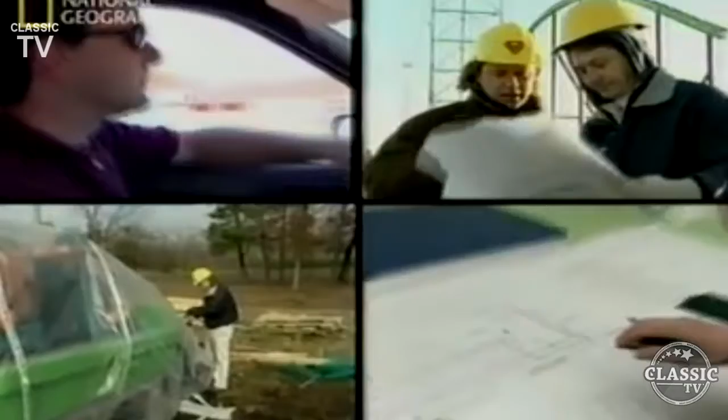This is ground zero of the roller coaster wars. On this empty patch of dirt, a crack team of engineers hopes to conquer the record books and build the coaster that rules them all. But it'll take a mountain of steel and technological wizardry to pull it off.

This is about bragging rights. For all its thrills, an amusement park's signature coaster is the one that counts. It is these monuments of pure power and speed that draw the big crowds.

If all goes to plan, they'll launch Kingda Ka in one year. It's a tall order, at 45 stories high, and accelerating from 0 to 206 kilometers per hour in 3.5 seconds. This ride will be the closest you'll get to getting shot off the deck of an aircraft carrier, or pulling out of a dive in an F-16.

So we've got to bring a crane in.

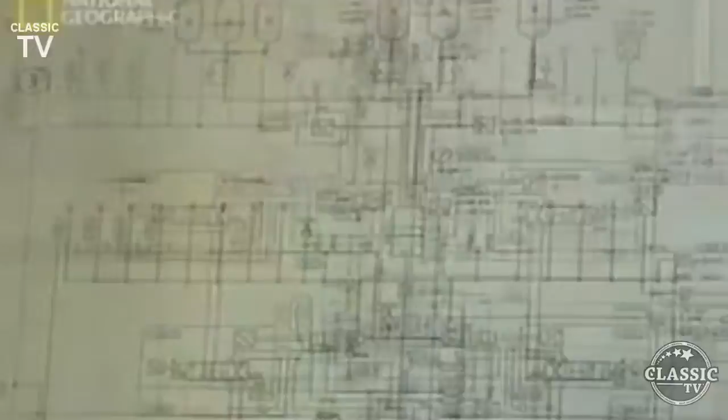But are the designers behind Kingda Ka pushing the technology to the breaking point? The track record for this new breed of rocket coasters is littered with mechanical problems. Will it be safe? Is it worth the $25 million risk? In the hyper-competitive world of amusement parks, you bet it is.

When you tell the public that the tallest roller coaster is in your park, people who aren't interested in roller coasters or parks are going to take notice, and they're going to be curious, and they're going to want to go to the park to even just look at it, even if they don't ride it.

In the last decade, the roller coaster wars have escalated. 61-meter megacoasters have been around for years, but in the spring of 2000, Cedar Point Amusement Park in Ohio threw down the gauntlet, breaking through the 91-meter height ceiling with Millennium Force, the first giga coaster.

For speed freaks, the watershed moment came in 1997 with Superman, The Escape, at Magic Mountain, California, shattering the 161 kilometers per hour barrier.

Up until 10 years ago, all roller coasters operated on a simple propulsion formula. A slow chain or cable lift pulls the train up the first hill, releases it, and gravity takes over.

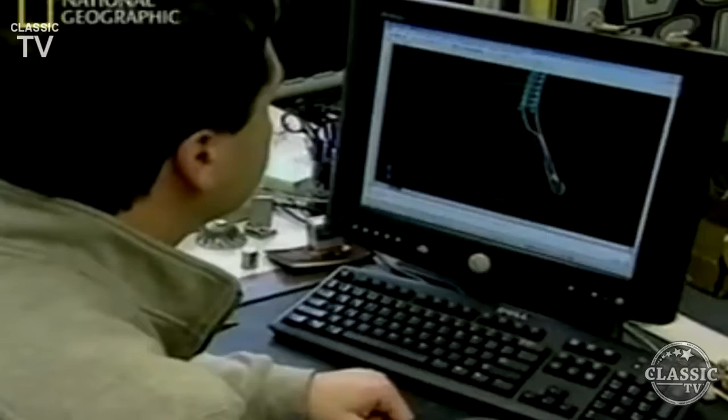Rocket coasters such as Kingda Ka have rewritten the laws of coaster physics, throwing out the idea of the slow ride up the first hill. Rocket coasters are shot out of the starting gate like a fighter jet is launched off an aircraft carrier.

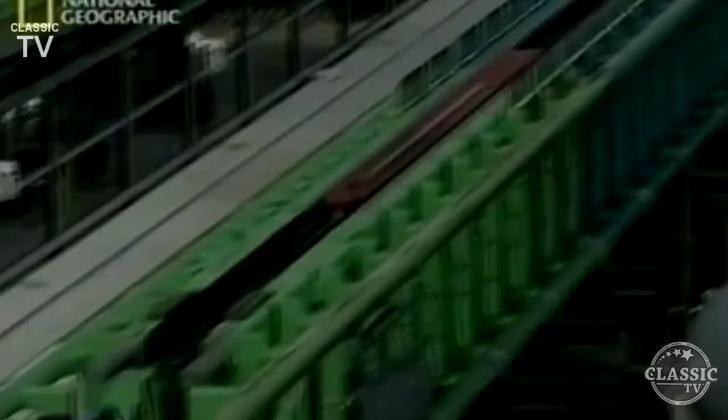The shuttle, or catch car, inside the track is locked into place like a coiled spring. The coaster is loaded onto it and cocked like the hammer of a gun. They pull the trigger and boom, away you go.

Simple. Not really. At least not at speeds in excess of 161 kilometers per hour, and not if you're the chief engineer, but we'll come back to that.

In 2003, a new rocket coaster shocked the industry, taking launch technology to another level and shattering 2 world records. Top Thrill Dragster at Cedar Point, Ohio, stands a gut-wrenching 128 meters high, making it the first strata coaster, accelerating to 193 kilometers per hour in about 4 seconds. It's the closest thing on wheels to a real top-fuel dragster.

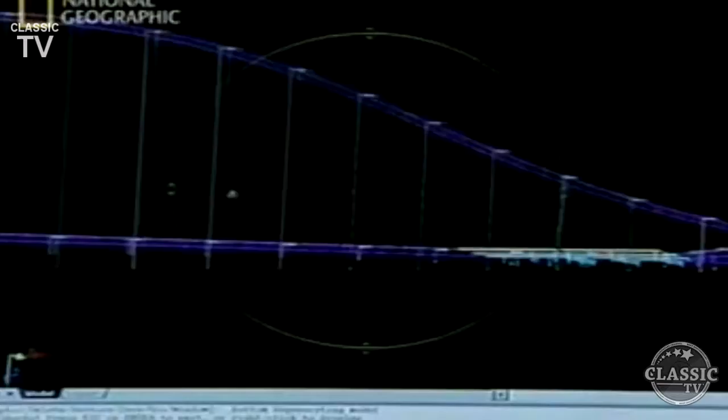Enter Kingda Ka, the monster ride destined to cut Top Thrill Dragster down to size. March 2004: The brain trust from Six Flags Great Adventure in New Jersey teams with Swiss manufacturer Intamin, the builders of Top Thrill Dragster. The concept for Kingda Ka is unveiled.

Yeah, it looks like it's all here.

Great. The idea is to begin with the blueprint of Top Thrill Dragster, but to build their new coaster, Kingda Ka, even bigger, faster, and better. The amount of power for this ride is substantial. The stakes are higher, much higher.

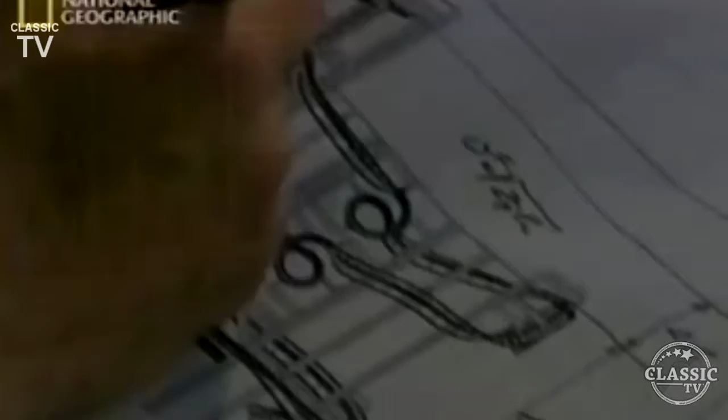The question is, how far can they push the technology? Can it be done? Can it be done in time? The money people are adamant: to be worth the estimated $25 million investment, it has to be ready to ride for the start of the next season.

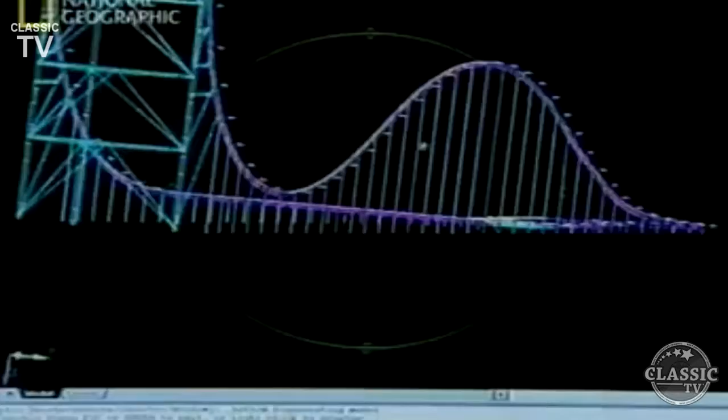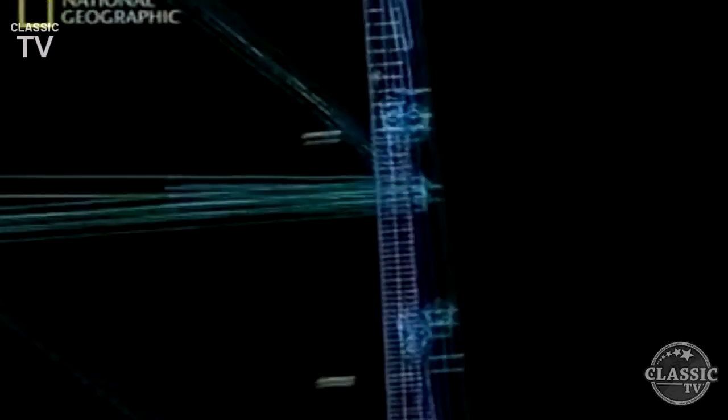Turning to one of the most sophisticated CAD design software programs around, the idea begins to take form. Every meter further and kilometer per hour quicker drives up the cost. Every change in the geometry of the track affects the stress on the rider's body. The formulas for G-forces must be recalculated. The design goes through hundreds of minor variations.

We talked about different heights, how high did we want to go. We looked at the possibility of one with 2 hills on it in the back, and we decided to stay with the single hill.

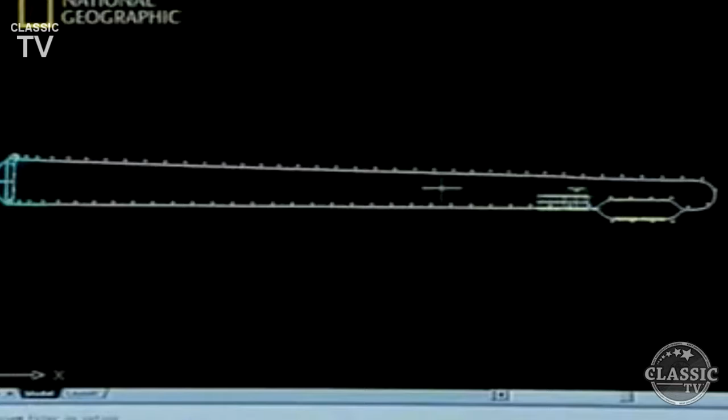The final design is a 950-meter-long track, packing the maximum thrills into the park's allocated space. Its centerpiece will be this soaring 139-meter tower, 4/5 as tall as the Washington Monument, breaking the old record by 11 meters.

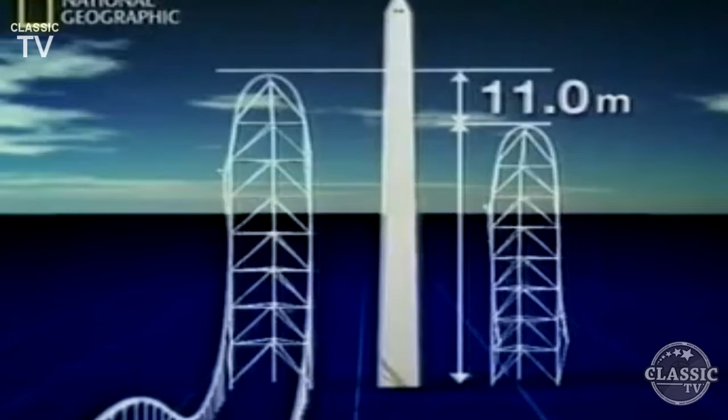The designers can even experience the ride from the passenger's point of view. First, the launch at 0 to 206 kilometers per hour in 3.5 seconds. You are shot up the tower faster than you can say, 'Get me off this thing.' Coming up to the top, we slow you down real nice for a nice look around, and then next thing you know, you're diving at the ground.

It's probably impossible to describe how this would feel to the average person who has never been in a jet fighter, or maybe a motorcycle, but even that is no comparison. This will pin you in your seat. It's nothing like you've ever felt before.

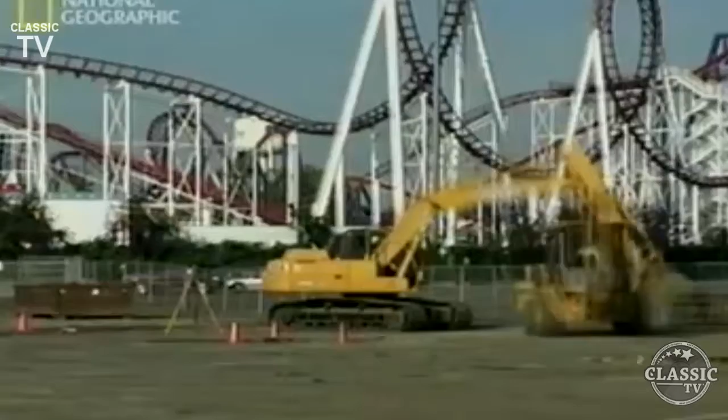Kingda Ka goes into production under a cloak of secrecy. If one of the other super parks were to find out about their plans and steal their thunder by launching an even taller, faster coaster, Kingda Ka would be a huge waste of cash. In this business, second isn't an option.

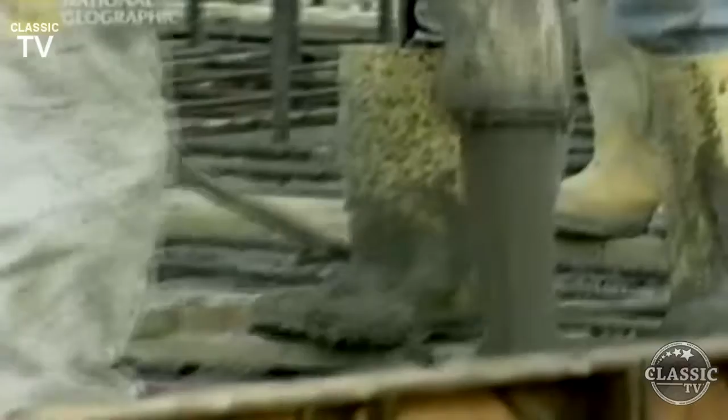August 2004. An A-list of engineers converges on the east coast of the United States, daring to build the dream coaster. As they begin digging the foundation, their deadline is set: April 23, 2005. They have less than a year, and the clock is ticking. So far, so good. If they fail, Six Flags will lose money by the bucket load.

Because of the magnitude of the project, we had to get an earlier start than we typically do for other coasters.

One crew works on building the giant tower, while a second crew works on the smaller Camel Hump Hill, approximately 45 meters away. They take advantage of the warm fall weather to get as much of the coaster's track done as possible.

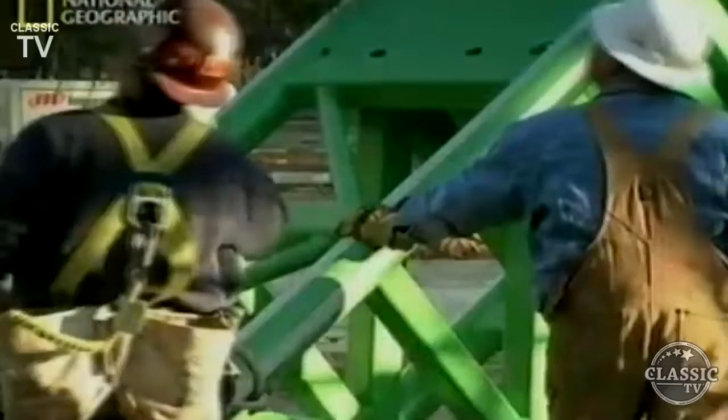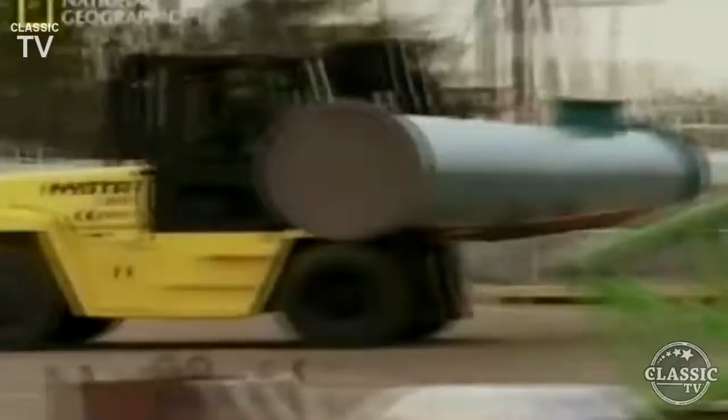By November, the coaster is beginning to take shape. The plan is to work non-stop, 7 days a week, even during the winter months. But just when they're making progress, a severe rainstorm shuts them down. Little do they realize that this is just an omen. There is much worse to come.

It is now late November, and the brutal storm that has shut down construction of the world's tallest, fastest roller coaster shows no signs of letting up. The deadline of launching Kingda Ka next spring is in serious jeopardy. Every day the rain falls is like watching thousands of dollars go down the drain.

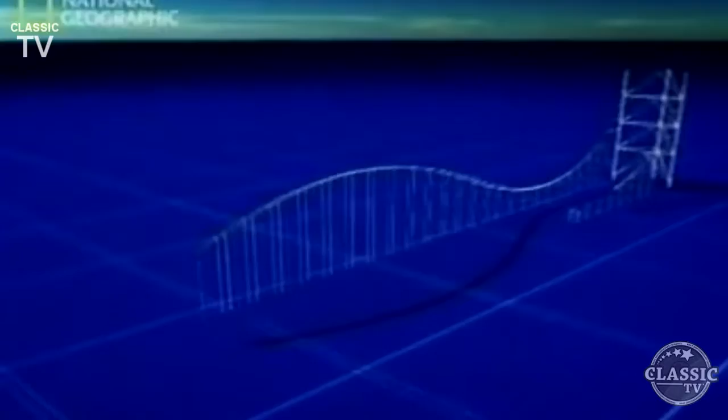One crew is supposed to be working on the mammoth 139-meter tower that stands half done. The other team is trying to finish the 39-meter high Camel Hump Hill. But work is at a complete standstill.

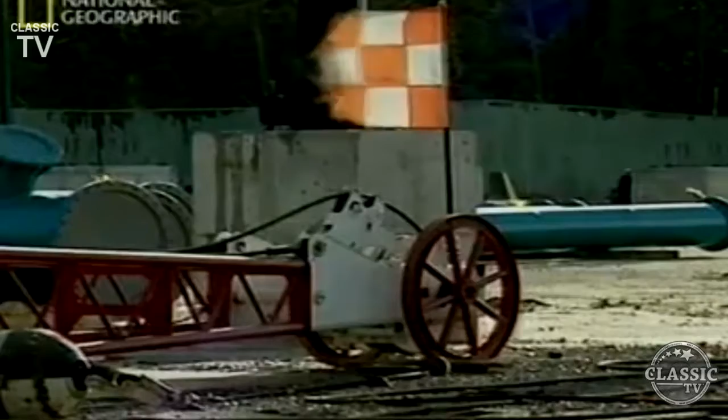We've been pushing hard to complete the tower as early as possible so that we can avoid days like this for any of the high work. As you can see, there's nothing going on in the air. It's rainy and windy. At these extreme heights, the danger from the heavy rain and winds is magnified. Moving around on dripping wet steel is inviting a fatal slip.

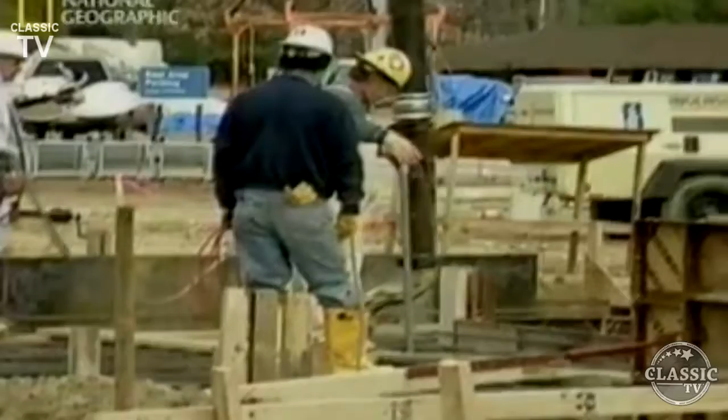The delicate task of maneuvering heavy sections of track into place is out of the question. Down on the ground, the picture isn't getting any prettier. The rain has flooded the foundation of the hydraulic room that will house the coaster's launch system, the heart and soul of the ride. The crew has extra work to do, pumping the water out. The clock is ticking, and it seems the hole just gets deeper and deeper.

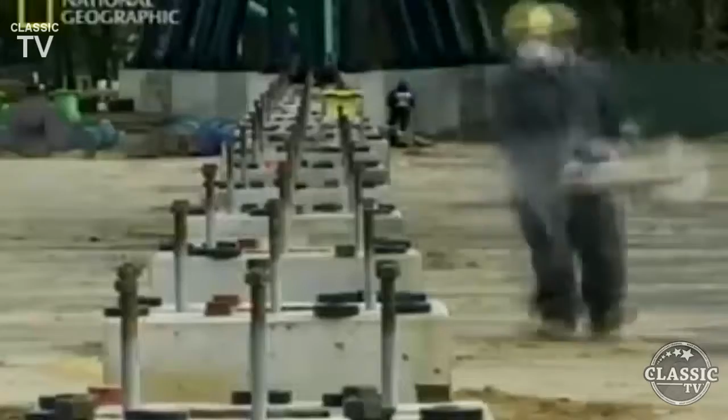Finally, after a lengthy setback, the storm abates. The crews will now have to work overtime to try and claw back the lost time.

Mother Nature's not been very kind to us. We've had problems. We've had a lot of rain. We've had a lot of wind. Yesterday we had fog so bad we couldn't see the top of the tower from the bottom. The cold's not so bad, but the wind is killing us. We're behind where we want to be, but we're working hard to get caught up.

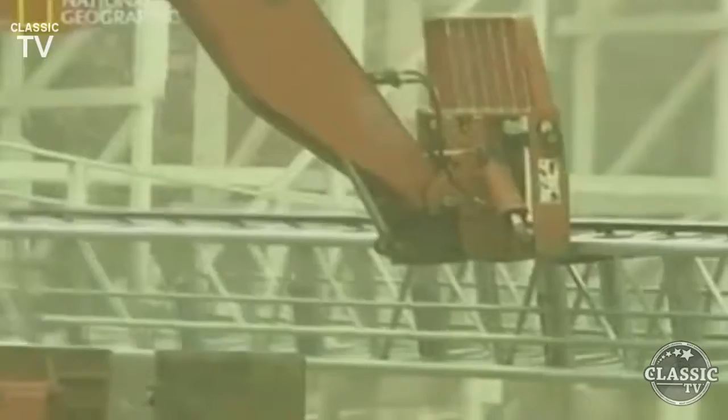A few weeks later, it appears their frantic pace has paid off. The 950-meter-long track is taking shape. They're nearly halfway there. The team is about to achieve an important milestone.

The topping off of the Camelback, the second highest point on the coaster. This 39-meter hill is designed to give riders a last burst of airtime, lifting them in their seats as they crest the Camelback and head for the finish.

Its completion gives the crew a boost in morale, but they know they are a long way from the finish line. Looming in the background is a reminder of bigger challenges to come: the completion of the record-breaking 139-meter tower. If they're to have any hope of finishing the project on schedule, they need to top off this main tower by year's end.

Time for a reality check. There are now only 20 shopping days to Christmas, and the crews break for the holidays. They have more than 30 meters to go.

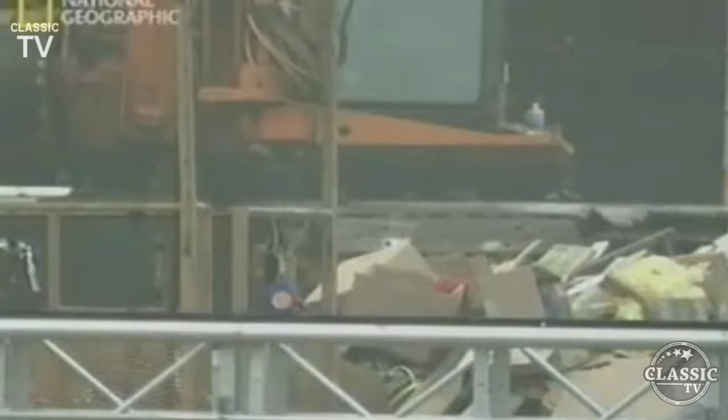Every meter higher, the more difficult the task becomes. Right now, with days like today, it's a bit in question, honestly. We're going to keep pushing hard to make that happen, give everyone an early Christmas present, but it's going to be tight, really tight.

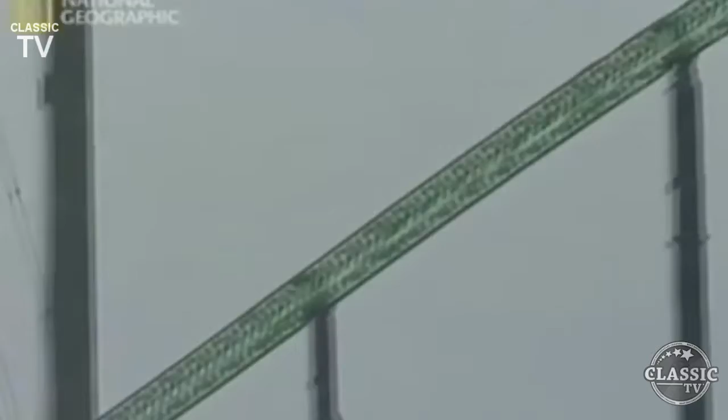Then, almost on cue, Mother Nature intercedes. A wicked winter storm blows in. Temperatures and the spirits of the crew plummet. The wind chill is 26 below zero.

The force of the winds is too strong, grounding the cranes. Once again, progress on the main tower is frozen. They have no option but to wait out the storm.

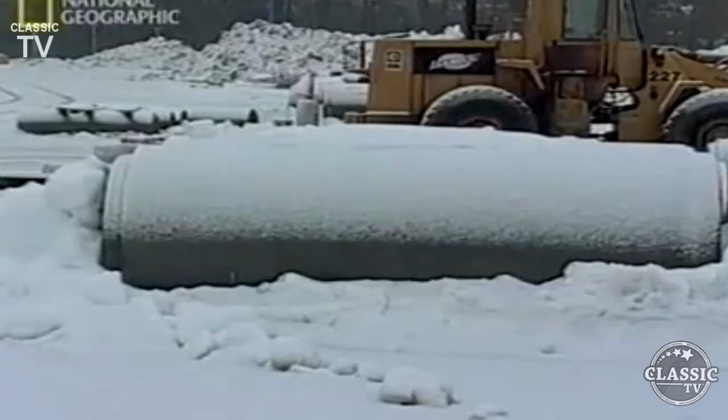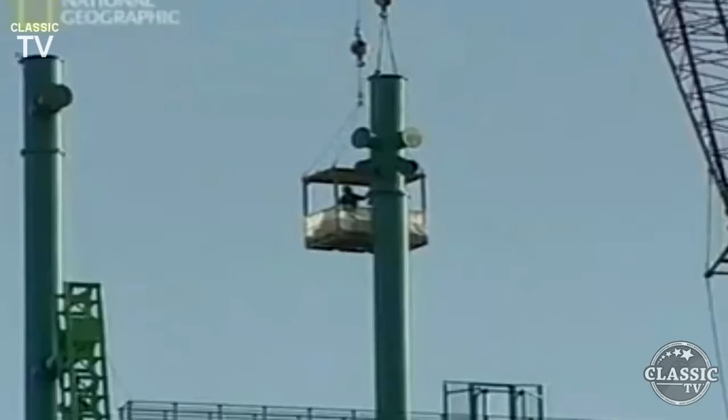Throughout December, work on the tower moves in fits and starts. The storm eases. They rush to the cranes and attempt to secure another piece of track in place. Then the winds pick up, and the vicious circle begins again. It's a frustrating, expensive process. Anytime we have a hiccup or a slowdown in the field, it's an awful lot of money and time wasted.

As they move their way up to the 120-meter mark, they are in hallowed roller coaster airspace. Only Top Thrill Dragster at 128 meters stands between them and the record. Engineering at this altitude is extreme.

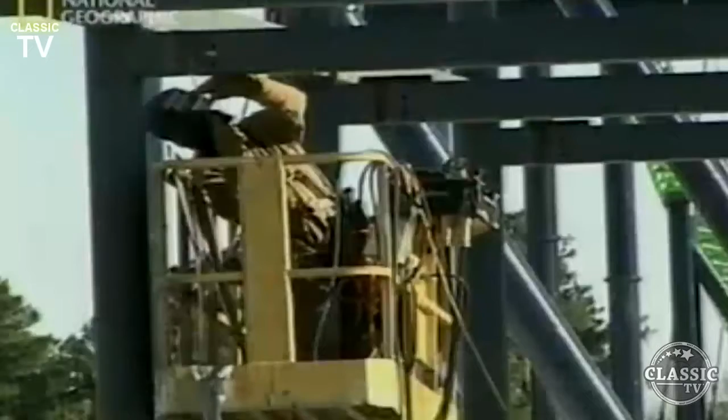There is one silver lining. The unfinished structure is standing solid against the full force of the storms. Not too far from the New Jersey coast, Kingda Ka has to be built to withstand hurricane force, over 160 km/h winds. For extra reinforcement, there are catwalks that serve as lateral braces in the arch of the tower.

As the workers look down from their perch at 121 meters, the magnitude of the project begins to sink in. In spite of the setbacks, they are now only one rung in the ladder away from topping it off. Now only 2 shopping days until Christmas. There is hope. They schedule the topping off of the tower for the last week of the year.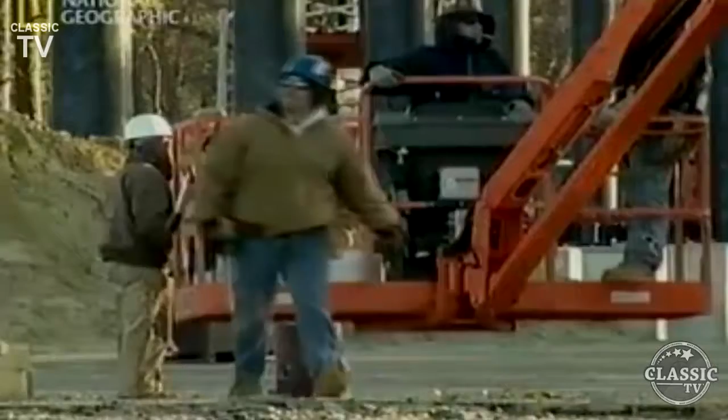Once that last piece is bolted into place, Kingda Ka will take the title of the tallest roller coaster in the world.

But the New Year's celebration isn't to be. Another cold front moves in and the crews are sent home for a bittersweet holiday.

The only thing that is clear about Kingda Ka's schedule is that making their April deadline to launch the ride will be an uphill battle. And every centimeter of progress will be hard-earned.

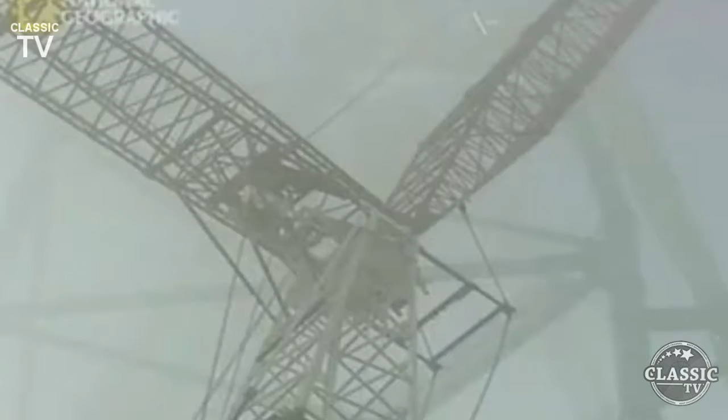We've been trying to get it topped out for a little while now, and the weather's been pushing us back between wind and rain and fog. We've been having a rough go of it.

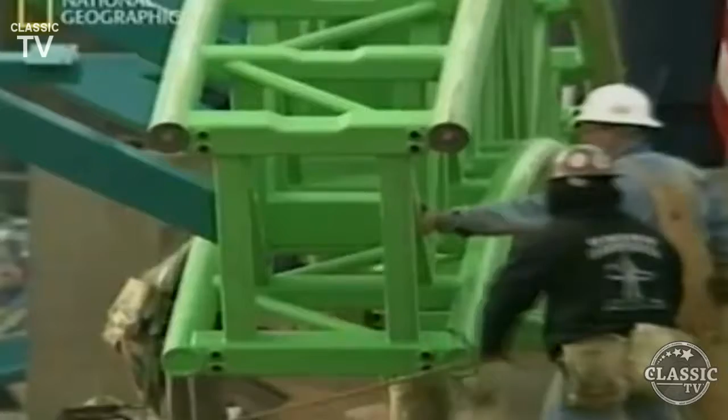The topping off will have to wait until the new year. When it finally happens, it'll be the crowning moment in coaster history. If the final arching piece of track is even a centimetre off on either side, the tower will have to be reconfigured.

With the eyes of the media and coaster fans watching, will this, the most important piece of the puzzle, be a perfect fit? The hopes of the engineers and the fate of Kingda Ka hang in the balance.

Engineers are working overtime, trying to top off the soaring 139-metre record-breaking tower of Kingda Ka. We're going to have to make the top first, and capture the title of the tallest roller coaster on Earth.

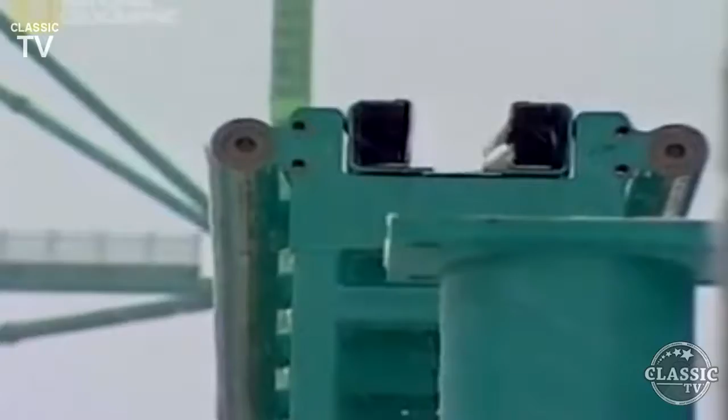It's now mid-January 2005. A horrible run of winter storms has delayed this critical event by nearly a month. Today, the engineers are determined to make it happen, no matter what the weather.

The crowd gathers early in the morning. The media has been invited in force. Cameras and eyes are trained on the top of the structure to witness this historic moment when Kingda Ka is crowned the king of the coasters.

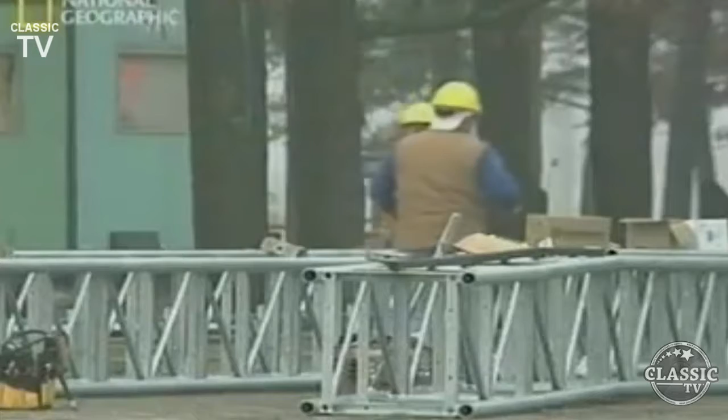Unfortunately, there's a new dilemma. Fog is looming all around the top of the tower. The crew can't believe their bad luck. This is a delicate operation, and visibility for the crane operator is essential.

Will the engineers have to send everyone home and reschedule yet again? They decide to go for it, hoping the fog will lift just long enough to fit the final piece in place.

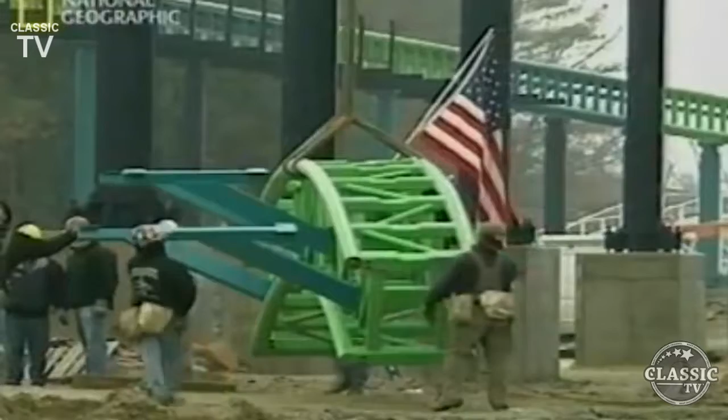The crane team concentrate on what they call the pick. When they lift the crowning piece of steel track, it must be at a precise angle and level.

It's a long way up. The choreography must be perfect.

When we set the top piece on, we may have to push those track pieces out just a little bit to allow us to fit in properly. We can go very quickly, or it may take up to upwards of an hour or two, depending on how difficult it is to fit the piece in.

Almost on cue, the fog breaks, and there's a clear view of the top of the 45-story tower. Finally, it's time for liftoff. They make the pick.

Everyone watches and waits. The fit must be exact. It is a game of centimeters.

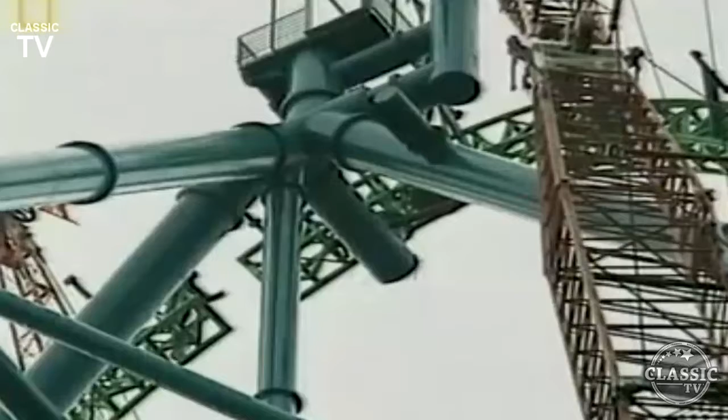After all the weather setbacks and delays, the record-breaking tower is finally complete. It's a historic day for the engineers and entire crew at Six Flags. They picked it quickly, they set it in, and they were able to make it up very, very quickly. Much faster than I thought. I actually thought it would take a lot longer.

But there's no time to celebrate. It's now only 3 months to the scheduled opening. The crew shift into overdrive to finish off the track and begin testing the coaster.

But their luck is fleeting. Their nemesis has returned with a vengeance. Another bitter storm blows in and dumps over half a meter of snow on the job site. Instead of firing up the cranes, workers fire up the snowplows. Another day goes to waste.

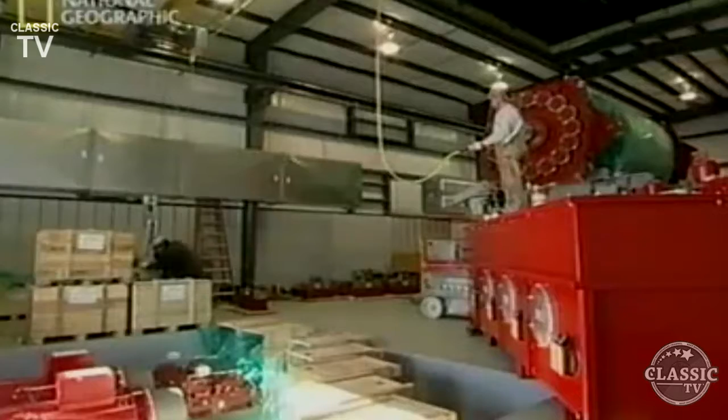While the track work on the fastest coaster on Earth is going painfully slow, there is good news at the base of the main tower. Inside this hydraulics building, the parts for the launch system are arriving as scheduled. It's like a late Christmas for the mechanics as they begin piecing together the components to the most powerful hydraulic launch system in roller coaster history.

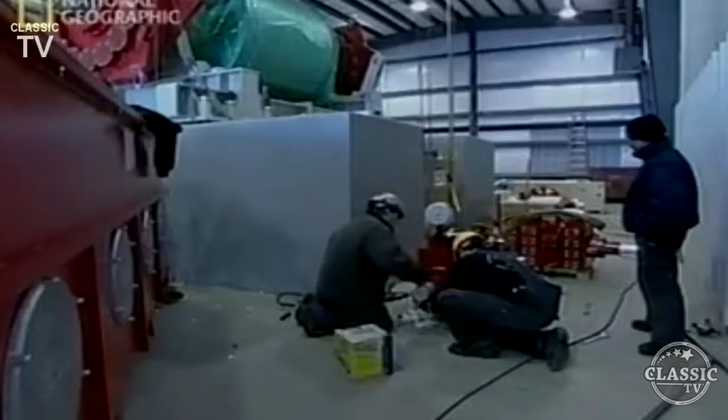Building the highest coaster in the world is a huge challenge, but the real catch is breaking the speed record. 0 to 206 in 3.5 seconds is no joke.

Unleashing this awesome power is a hydraulic launch system more massive than anything of its kind in the coaster world. 12,500 horsepower in a single blast, more than 12 times the horsepower of a Formula One race car.

The launch system is basically a high-tech catapult, and when it's all put together, it works like this. At the starting gate, the train of roller coaster cars are loaded and locked onto this red shuttle, called the catch car, which is pulled along the track on a cable. The hydraulics are what powers the cable.

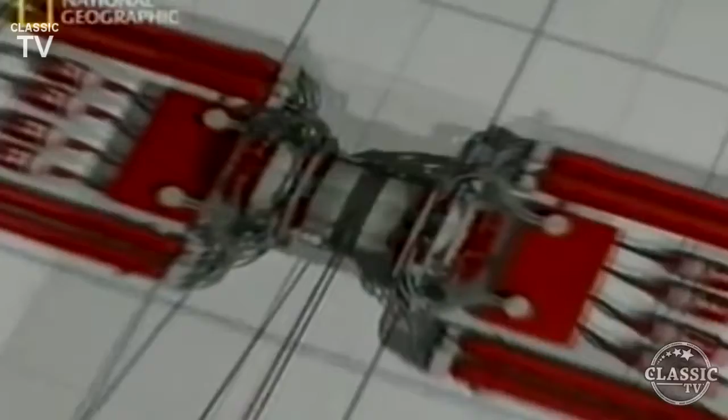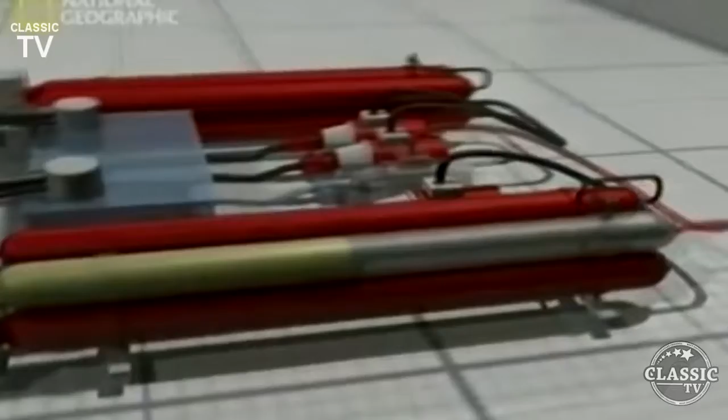When the operator pushes the launch button, there is no turning back. The hydraulics spring into action. 18,927 litres of hydraulic fluid is forced through a series of motors. The motors spin a giant drum that rapidly winds the cable, pulling the coaster down the track and up to the top of the tower.

The engineers like to think of the hydraulic system that powers the launch like a big squirt gun. I like to think of it sort of like the world's biggest super soaker system. A super soaker works when you pump the handle and put high pressure air into that little tank, then you pull the trigger and the air blasts the water out.

With a price tag of about $5 million, that's one expensive super soaker.

After a few weeks of tinkering, the launch system resembles a giant spider. Massive hoses sprawl out of the drum and motors and connect to the hydraulic fluid reservoirs. It's slow going, but if they don't get every connection right the first time, they'll have to take it apart and start again.

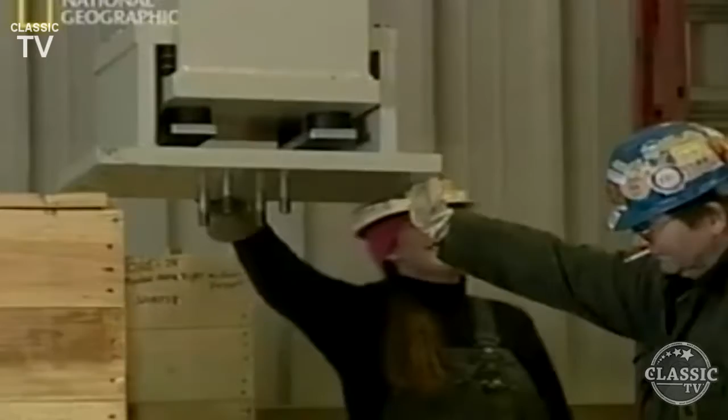They are still waiting for delivery of the most important component of the hydraulic system: the massive accumulator tanks that are the heart of the ride, pumping the hydraulic fluid through the motor that supercharges the coaster to record-breaking acceleration.

Accumulators are like the heart of the ride. It's kind of like the way a heart pushes the blood around through the body. The accumulator pushes the hydraulic fluid through the motor so we can get the launch up to speed.

Got it? That's good. The mechanics are getting nervous. The tanks should have come 2 days ago, but the trucks are running behind schedule because of the heavy snowstorm.

But on the third day, their luck turns. The trucks carrying the accumulator tanks have arrived.

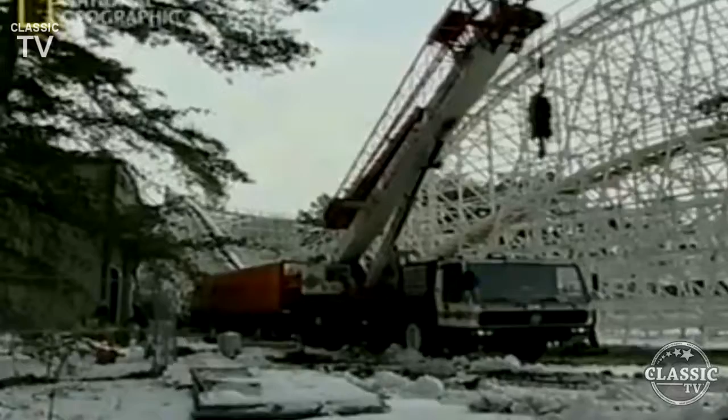The hydraulics are about to get a serious power boost. But first, they have to get them inside. Each of the 4 accumulator tanks weighs 18,143 kilograms. They'll have to be hoisted out of the trucks by crane.

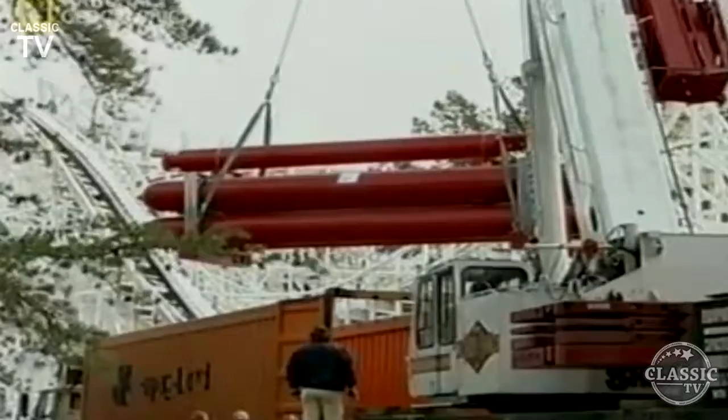One false move, one break in a connection could send the accumulator to a premature death. It would be a fatal blow to Kingda Ka. The accumulators take a year to make. There are no spares.

It takes all day, but at last the accumulator tanks are in place. And the countdown to the most powerful roller coaster launch in history has begun.

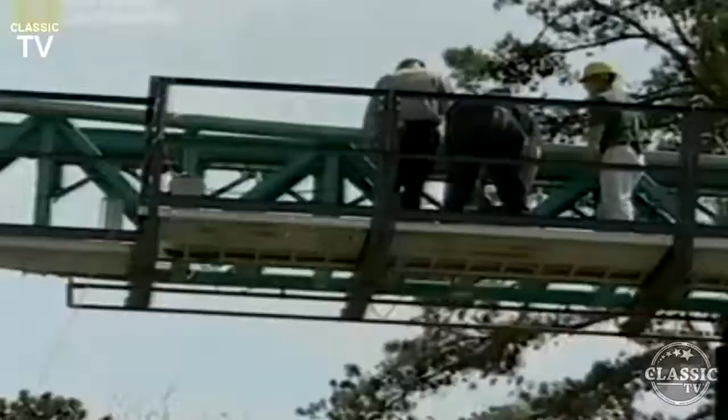I've never dealt with a hydraulic system like this. But deal with it they will. In trying to eke out every last drop of acceleration, they must ensure that every last component of the launch system, the track, and the cars can handle the stress. Every part has a breaking point, a fact of engineering that might come back to haunt them when they least expect.

With the accumulators in place, they're poised to begin the next phase, the test launch of Kingda Ka. It's one thing to build it, but will it work? Will the biggest, fastest roller coaster on Earth clear the final hurdle?

February 15th, 2005. In spite of one of the most severe winters in the history of the eastern United States, the crew building Kingda Ka, the world's tallest, fastest roller coaster, have finally bolted the last piece of track into place. But the delays have come at a cost. They're over budget and weeks behind schedule. Opening day, April 23rd, is fast approaching.

At this point, the project, we're a little bit behind where I plan to be. We're working a second shift mechanical right now to try and get ourselves back on track.

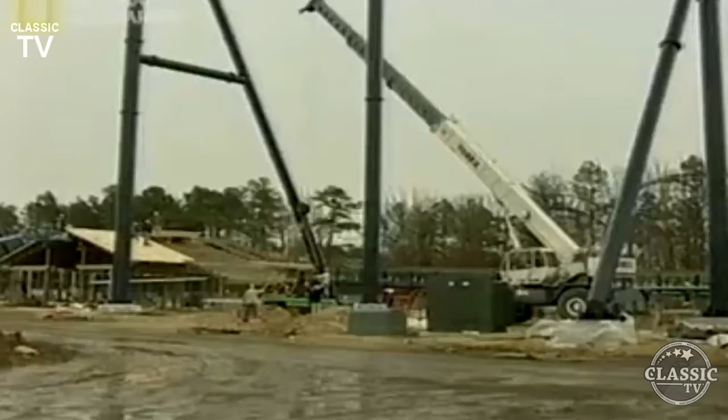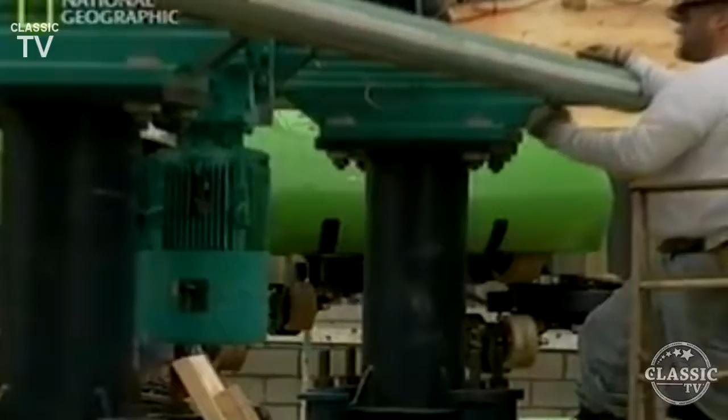That means getting the trains loaded onto the track. As the crane lifts each individual car into place and the crew guides the wheels onto the steel track, welders must shear down part of the track so the base of the train can slip over it. Every wheel has to be fine-tuned to glide perfectly along the rail.

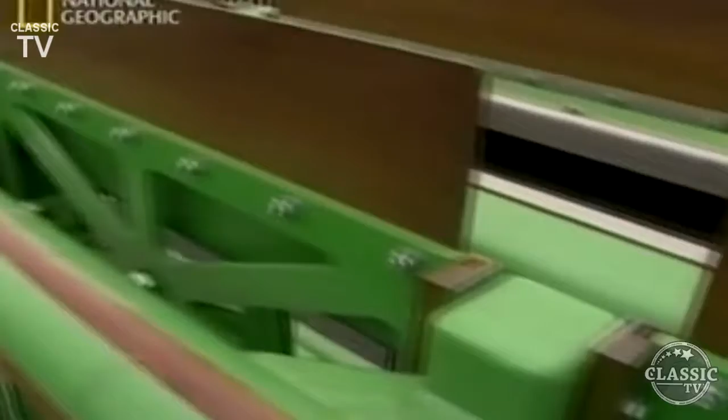They quickly move on to the next phase, installing 473 magnetic brakes along the track. When you're dealing with speeds of 206 kilometers per hour, you need a fail-safe method to control that speed.

From top to bottom, every joint and cross tie has to be a perfect fit. Every centimetre of track must be inspected to make sure there is clearance on all sides for the train and passengers to pass through safely.

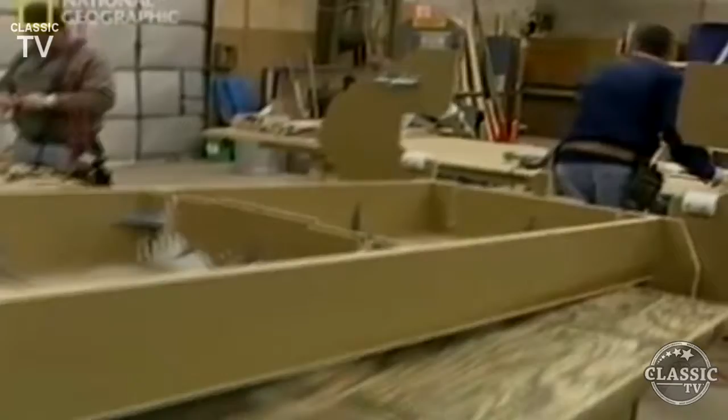The engineers are preparing to conduct a pull-through test, building a lightweight fixture out of wood to simulate the exact dimensions of a train car with the passenger's arms fully extended. The catch is, they have to manually pull it around the entire track.

Checking the clearance on the lower parts of the track is easy, but the 139-meter tower is an entirely different story. They come up with an approach that has never been attempted before.

Set you guys up on there. Just take us up, drop us off with our fixture. There we go.

Down, hold the load, move down. The crane delivers engineers and the fixture to the top of the tower.

They must tie themselves securely to the track and move carefully. They're 139 meters off the ground with no safety net.

That side goes up, there you go. One wrong move or one misstep could be fatal.

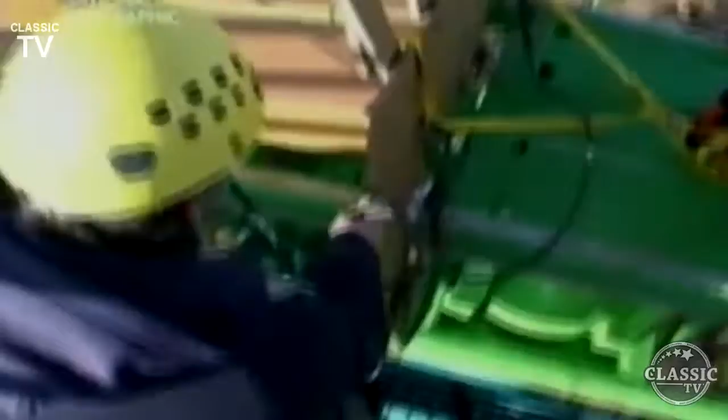Let's take a few moments here. Good? Okay, so it's running by itself now, right? Okay. So far, so good.

A few minutes into the test, they hit potential trouble.

Well, how was the clearance? We're about actually a half inch. About a half an inch? Three-quarters of an inch. The plywood extension that simulates a rider's arm appears to be about 2.5 centimeters over the line at the top of the tower. Yeah, we got about 2 inches.

In this business, a centimeter or two is huge. It could mean rebuilding this section of the track. 2 inches over the top of it. It's not over the side, though.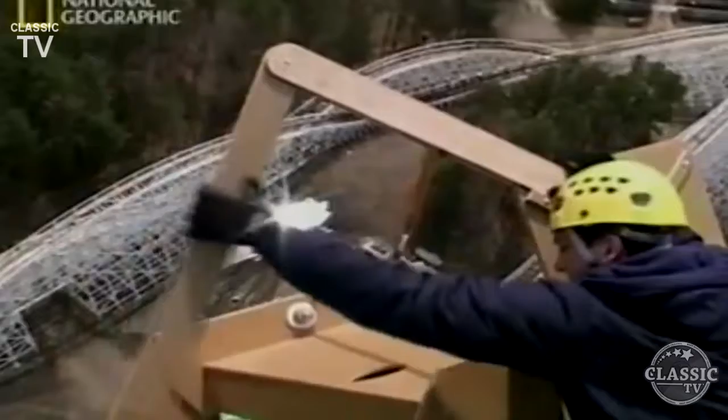They remeasure on the spot. It turns out their plywood arm is a few centimeters longer than the required safety envelope. A false alarm, but the delay is costly.

If they don't finish the test before dark, they'll have to start all over again, from the top down tomorrow morning.

10 hours later, and the light fading fast, the engineers are back on solid ground. The track is all clear. Nice job. Every little test like this, or big test like this, is one step closer to opening it.

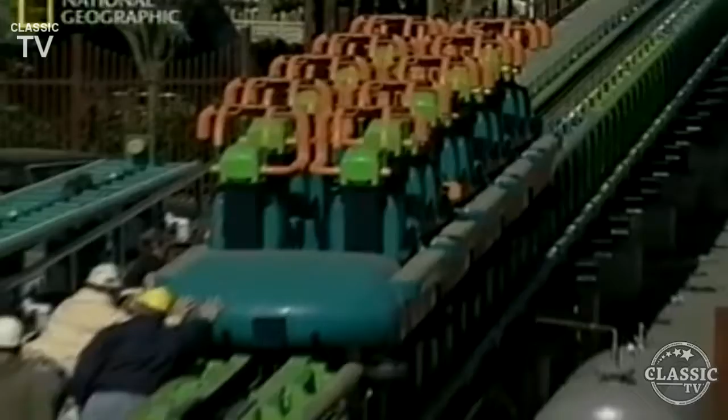With computer and system checks complete, it's finally time to launch the train. So you'll see that train roll backwards just a little bit. And then they'll know it's there, and then it'll launch and go.

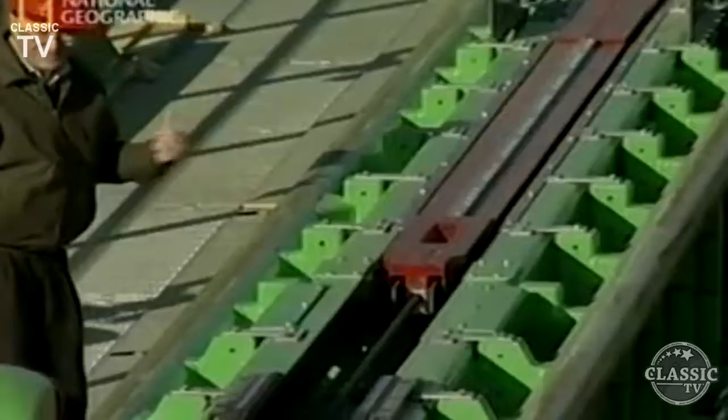Engineers have been waiting for this day for more than a year. It's time to see if their hard work will pay off. There's always a little bit of apprehension until the first train gets all the way around the track to make sure there aren't any mechanical interferences.

They conduct their first launches at night, so they don't interrupt construction work around the launch area.

They begin launching the train at slow speeds, easing their way up to 206 kilometers per hour. By 3 in the morning, they're ready to try launching at full speed. It'll be a huge victory if it makes it over the top on the first full-powered run.

The handler has to move the catch car back and forth to be in automatic position. But there's a problem. At full power, the train does not clear the tower.

They recalculate, adjust the launch settings, and try again. They work through the night. With the sun beginning to rise, they think they've cracked it. Jeff, are we ready? Go ahead, Jeff. All right, here we go.

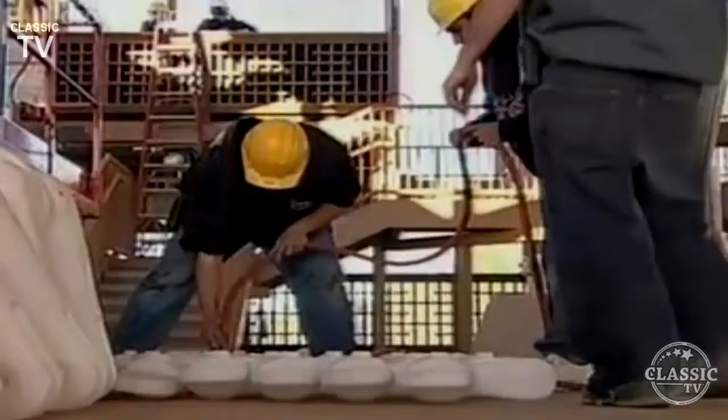Okay, is the plan to run the loaded one out and launch it too? The plastic dummies are filled with water to simulate the weight of 18 passengers.

The hydraulic launch system is straining to propel the empty trains up and over the top of the tower. Now they have to step up the power surge to push the heavier load over the top. Will it be enough? You're going to pull forward.

The train cascades backwards. They reset and try again. Not looking good. The hydraulics seem to be okay. Suspecting the problem is in the catch car, they call it a night.

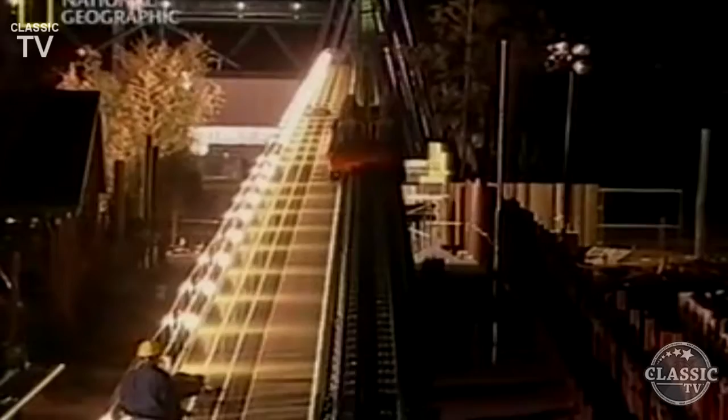The following day, they call in the specialist. Hey, Joe, the catch car isn't coming back. I don't know if they did it manual or whatever.

A few hours later, they're ready to try again. We're ready to launch. How about you, Jeff? I'm clear. It's a last-ditch effort. If this doesn't work, the catch car will have to be replaced. The whole season could be lost.

It's a success. After more than a year of planning and construction, the ride finally appears to be working smoothly.

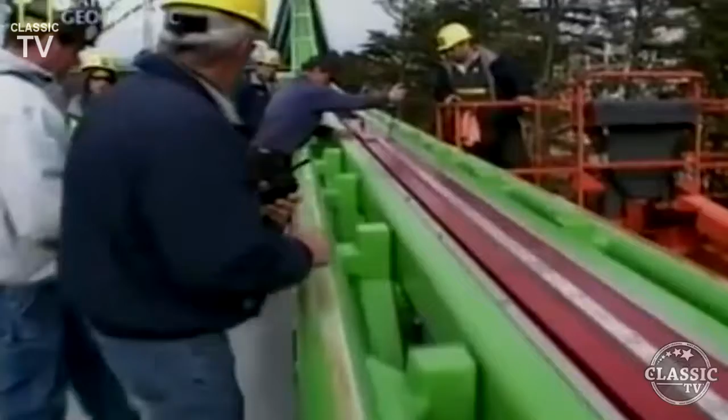Their victory is short-lived. After repeated test launches, an inspection reveals that the launch cable is already wearing out. The engineers are forced to stop the test launches less than two weeks before the scheduled opening. After all this work to get it up and running, patience is now wearing thin.

If they don't get their green light, they'll come down and figure out what's going on. The public unveiling of Kingda Ka is pushed back by nearly a month, but that is the least of their worries. If they don't figure it out fast, they may have to put the brakes on altogether. The whole summer season is in jeopardy.

April 23rd, 2005. It was meant to be the grand opening of Kingda Ka, but the world's tallest, fastest roller coaster is going nowhere fast.

Unfortunately, the engineers are still tinkering with the complex cable launch system that is supposed to catapult the roller coaster out of the gate at 206 kilometers per hour and up and over the 139-meter high tower.

Night after night, they fire off unmanned test launches to try and work the problem out. We have some cable tension issues. We don't want that to happen on this. We've got to keep a proper amount of tension on the cable.

They decide to replace the entire cable that catapults the train at record-breaking speeds up to the top of the tower. The next night, they fire up the most powerful hydraulic launch system of its kind and hope for the best.

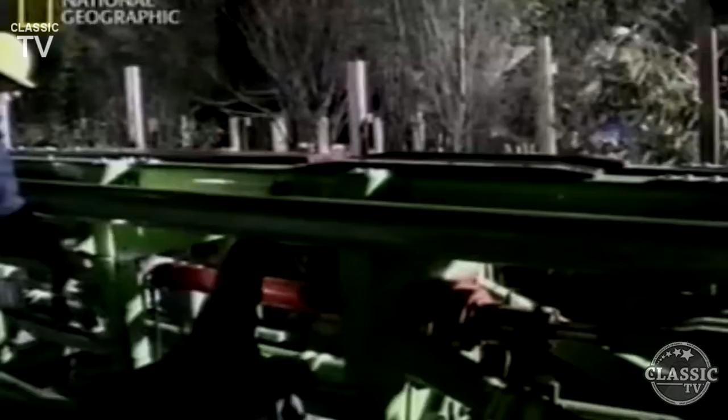If they can work out the kinks, these same engineers who built Kingda Ka from the ground up will get to ride her first. But until they get the kinks out, the only passengers they can risk are the water dummies.

No, the water dummies were fantastic, fantastic riders. They didn't talk back. They were a little quiet. We were looking for a little more response out of them, but no surprises. The water dummy launches go smoothly.

The engineers move on to testing the coaster at full capacity, running multiple trains in succession and hoping the new cable doesn't start to slip. We've got to continue cycling it. We want to prove it out, get rid of any nuisance issues, so that it runs consistently.

We're testing all the different safety devices to make sure that everything we need to monitor is being monitored, and verifying that those are all working. Once we've done that and checked the system response, then we'll be ready to put people on it.

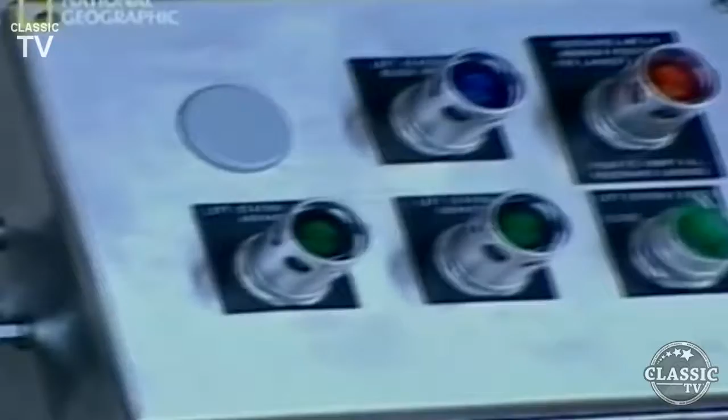We're getting there, you can see the light at the end of the tunnel. Four weeks and nearly 600 hours of test runs later, Kingda Ka is declared sound. It's a month late, but still a remarkable feat of engineering. Ten months after breaking ground, the king of all roller coasters is finally ready for its first real passengers: the engineers who built it.

Even for the team who put her together piece by piece, being the first to ride Kingda Ka is a daunting prospect. We've gone over everything twice, we verified it, and everything is good to go.

This ride might turn your hair gray.

All right, lap number one. After months of back-breaking deadlines and sleepless nights, they're finally about to make history. Yeah, we're gonna be down there, and then back here, and over there, like that. Yeah, number one.

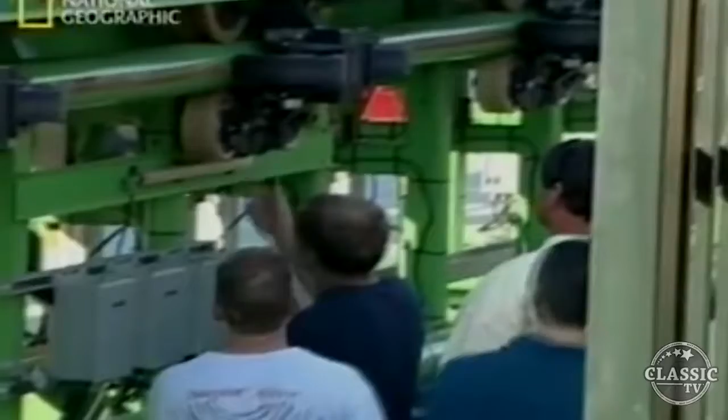But Kingda Ka's moment of glory is short-lived. A few weeks after the grand opening, the ride comes to a screeching halt. According to Six Flags, a bolt in the track sheared off during an unmanned test launch, ripping out a piece of plastic liner and damaging the brakes on the train.

For almost two months, the entire area around Kingda Ka is sealed off. The trains sit idly while rumours circulate about the demise of Kingda Ka. Will the greatest coaster on Earth be back?

In early August, the announcement finally comes: Kingda Ka is fixed. Engineers order and install larger custom-made bolts from the coaster's manufacturer to keep the liner inside the launch track from coming loose. This time there is no grand opening, just a sigh of relief.

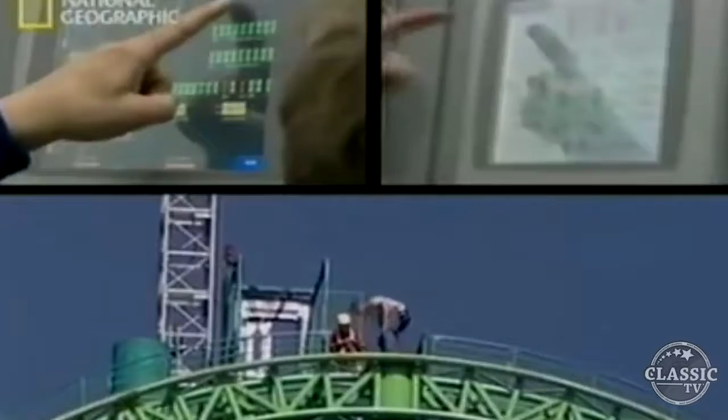The team behind Kingda Ka learn the cold truth: if you want to be the champ, you can expect to take some hard knocks on the way to the top.

The question is, how long will the reign of Kingda Ka last? I'd be very excited just to hold both records, tallest and fastest, for a long time, but there's always someone looking to break that, and we'll look to get it back if we're not able to keep it.

It was only a few years ago when 161 kilometers an hour and 121 meters seemed insane. With the rise of this megastructure, there is no doubt someone out there is already plotting to build the next supercoaster. In the escalating coaster wars, there's no such thing as too high or too fast. But for now, Kingda Ka is the new king of the hill.